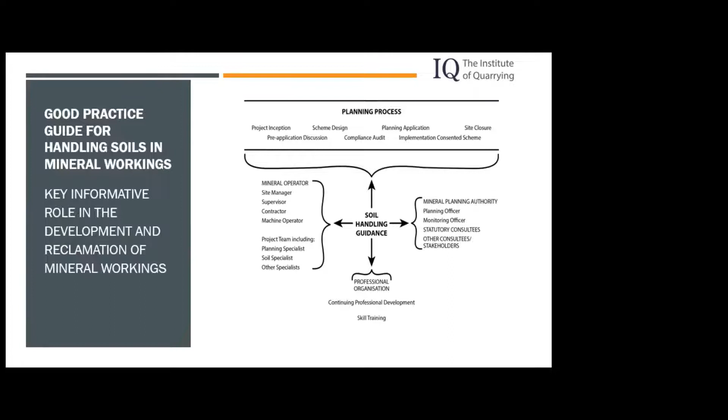It also has a training role by way of the Institute. And I think, just as a side comment, those in operations need to be involved and work as an integrated team from the planning to delivery of the soil works, and not as separate parties as often happens.

Yes. Sorry, we'll get the hang of it. We'll get the hang of it. It's a little monster, isn't it?

The need for the new guidance has come about because soils are now recognised in planning policy terms as natural capital, and as such are important for the well-being and sustainability of our way of life, just as mineral resources are. In this context, soils are to be viewed to be of equal importance to the minerals they cover. This is really a new way of looking at things and treating soils in mineral workings.

Success. The policy applies to all soils for their safeguarding and sustainable management. It applies to relatively young, shallow soils equally, as well as old, deeper soils associated with agricultural land uses, and to mineral soils as well as peat wherever they are deemed to occur, and to soil forming materials where they are to be relied upon.

All are to be restored to a high standard. No distinction is to be made between the high ALC grades 1 to 3A, i.e. the best and most versatile type, what we often refer to as BMV, and the non-BMV ALC grades 3B to 5 agricultural soils, or any other soils.

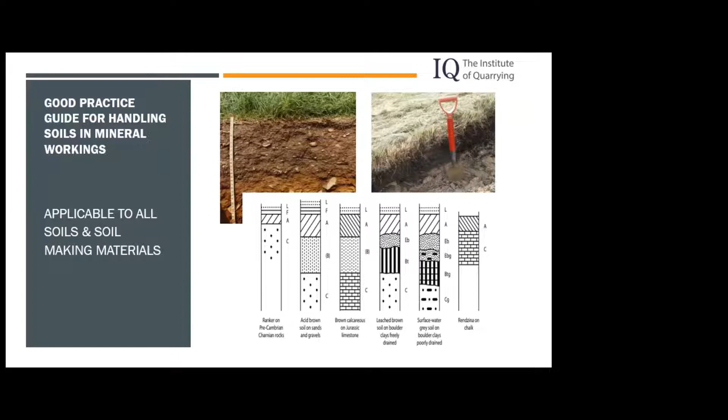I'm going to say a little bit now about choice of machinery and practice.

Safety is the overriding operational consideration in the adoption of the guidance and deployment of machinery and practice. It is for the competent operator to decide. It needs to be conveyed and integrated into the design and operations from the inception of schemes. The safety reasons for not recovering soil resources or adopting the guideline practices must be made clear in the Soil Resource and Management Plan, the SRMP, which I will say a lot more about later.

This is not new, by way of comment, and will already be the required practice. What we need to do is communicate the scope for the safe use of machinery and practices at the planning as well as the work stages. Safety will determine and justify what is proposed.

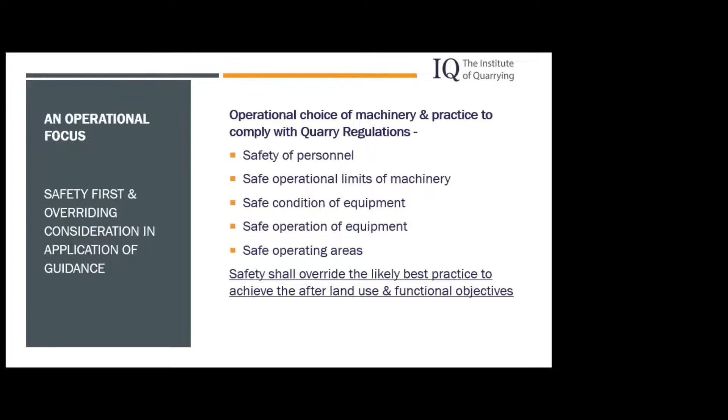Operational costs are not a reason to dismiss the guidance and should not override the choice of machinery and handling practice. If cost is the deciding factor, this should be declared in the SRMP.

Typically, cost factors include differential plant rates, amount of plant needed, combination of plant required, capability and work rates, availability. But they must also include the associated remedial work required.

Total costs are not simply the price of the number of machinery units or amount or speediness of work involved by the adoption of a practice, but they are also the experience of the machine operators, the mode of working, i.e. whether it's progressive to avoid double soil handling, the occurrence of delays, and the costs incurred by additional remedial works.

Operationally, this is by way of comment. For more realistic and competitive costings between machinery options and practice, we will need to factor into the cost analyses and budgets those remedial operations that are an integral part of the methodologies and practices that cause compaction. Whilst this is not new, the guidance makes it clearer by incorporating the actions required within the methodologies themselves.

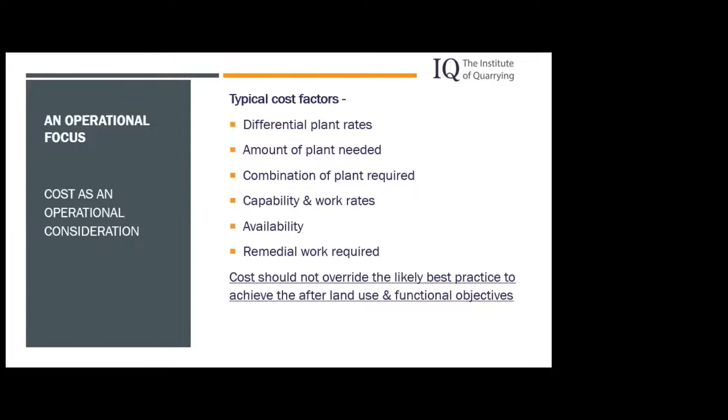Say a little bit more about methodologies, choice of machinery, just to put them into context. The guidance provides methodologies for two combinations of machinery and one hybrid practice. The four handling practices for the stripping and replacement of soils.

So the machinery operations to strip and replace soils are either an excavator and dump truck, or a bulldozer, dump truck with excavator to load. The handling practices to strip and replace soils comprise either the bed strip practice, the windrow peninsula practice, the modified layer by layer practice, or the hybrid practice.

All these are shown and described in the guidance, so I shall not go into detail at this particular point. In the guidance, there are the excavator and bulldozer-based methodologies for soil storage, removal of non-soil artifacts, large stones, and for decompaction. Obviously, other machinery not directly handling the soils may also be needed to maintain access routes, so on and so forth. You may have seen that motorized earth scrapers have reappeared.

These are not included in the guidance, but methodologies for their operation can be found in the MAFF 2000 guidance, which is still available on the DEFRA archive website. The choice and rationale for the machinery and handling practices should be given in the SRMP, which again I will say more about later.

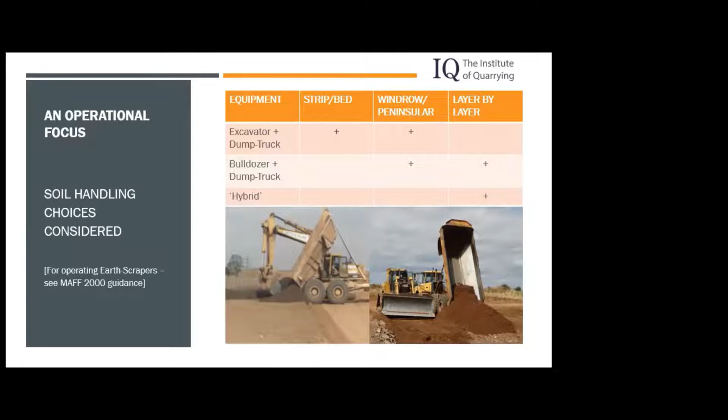Sorry, I should have been showing you these slides. Those are the basic choices of machinery, and this one is where the guidance provides detailed operational methodologies for each machinery and handling practice, and remediation measures to be deployed. These are provided as individual standalone sheets, A to O, which can be distributed to guide contractors and machine operatives.

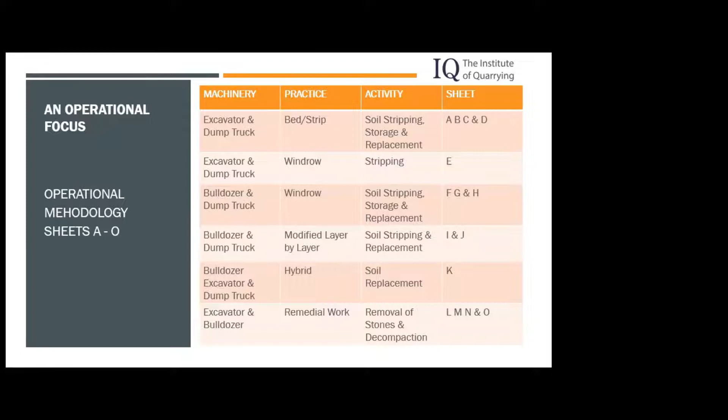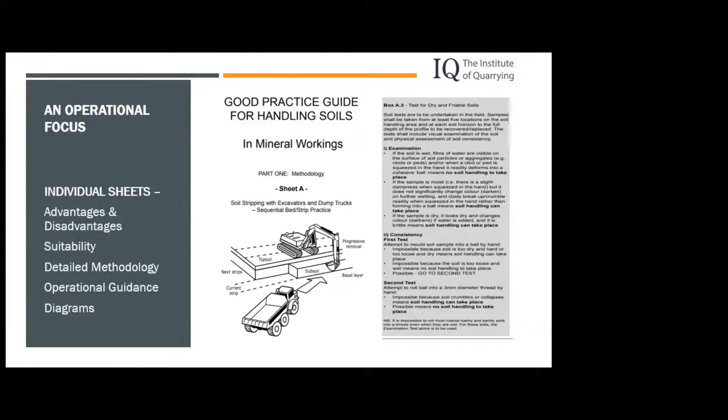Each methodology gives advice on the advantages and disadvantages and their suitability. There are procedures for determination of soil wetness and protocol for wet weather included. Importantly, to avoid them being overlooked in the soil replacement operations, remedial measures are now integrated into each methodology for soil replacement.

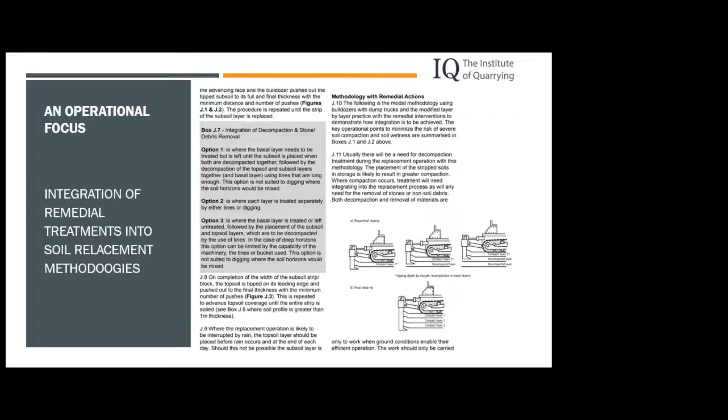I'm going to say choice of machinery and practices and soil compaction. The new guidance is based on a risk-based approach where judgments by informed soil professionals determine the significance of choices adopted and consequential actions required. I will come back time and time again to this particular approach and the integral role that the professional soil scientist has to help you see your way through the guidance and its implementation.

Operationally, soil compaction arising out of soil handling is the most commonly occurring condition limiting the achievement of intended land uses and services on restoration. After safety, compaction is the main consideration in determining the methodology to use. Compaction is the compression of the soil structure form which determines its functional characteristics. This is primarily caused by trafficking by machines over the soil material and when in bulk transit and storage.

The degree and significance depends on the machinery used and handling practice adopted, but also the soil textural class and its wetness. Remedial treatment during and after soil replacement is possible, but the effectiveness is dependent on the capability and condition of the equipment being used and the soil being in a dry condition.

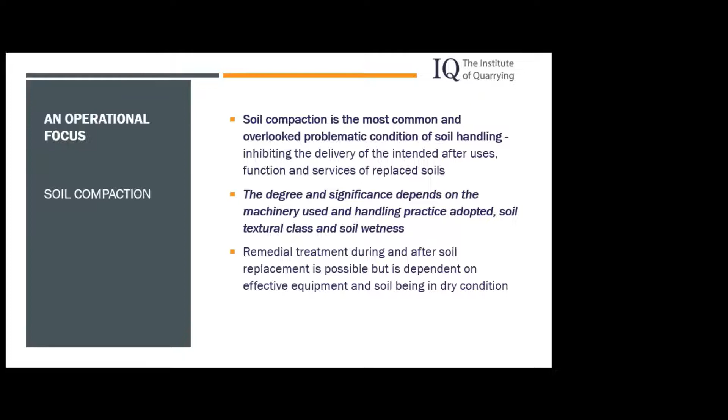Operational effectiveness is less certain than the avoidance and minimization of compaction. There may be restrictions on implementation of effective remediation by ripping or digging, where the replacement soils are over inert backfill and situations like silt lagoons. By way of comment, the main operational consideration in most cases needs to be the avoidance and minimization of compaction for the certainty and cost-effective delivery of the intended land uses and services and their outcomes.

All these slides that you'll now see, which may not be particularly clear, are taken from the actual guidance itself. So I'll make some general comments over them.

Operational guidance is given as to the inherent risk of causing compaction through the choice of machinery and handling practice. The relative risk of compaction by the machinery and handling practices are shown in this particular slide, where the least risk, when soils are dry, is with the excavator, dump truck, and the bed strip practices combined. Hence its often favoured status.

The highest risk is with bulldozer dump trucks using the windrow, peninsula, or layer-by-layer practices, even when low ground pressure dozers are used. That might surprise some people, but it's actually a fact.

Comment: operationally, the need for remedial work can be managed by selecting an inherently lower risk option. Here, the soil professional will be able to advise as to the risks and the consequences of particular choices and the restoration outcomes. So there's not a prescription that you must use one particular method over the other. It's a matter of what the circumstances are and what the risks involved are, and whether there is a consequence for the particular type of land use that is being aimed at. That's why you need professional advice.

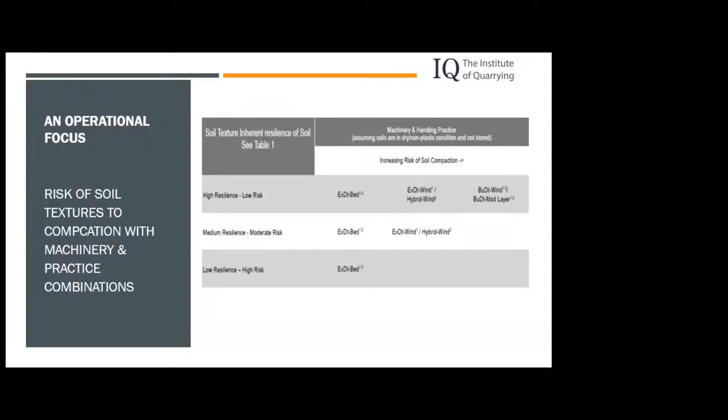There may be circumstances when the guidance for soil stripping cannot be followed, such as the occurrence of archaeological artifacts. In this slide, only certain practices may be acceptable for watching briefs, investigations, and recordings. In some cases, trafficking of the topsoil may even be necessary to protect the particular archaeological interest. Again, the justification for the choice should be given in the SRMP, which I'm going to come to shortly.

The expectation is that soil compaction will result from soil handling using bulldozer-mediated practices, and all options where the soils are in a wet condition. Decompaction treatment, as advised by the soil professional, should be deployed during the operations and/or subsequently in the aftercare period. Again, these are to be dealt with in the SRMP.

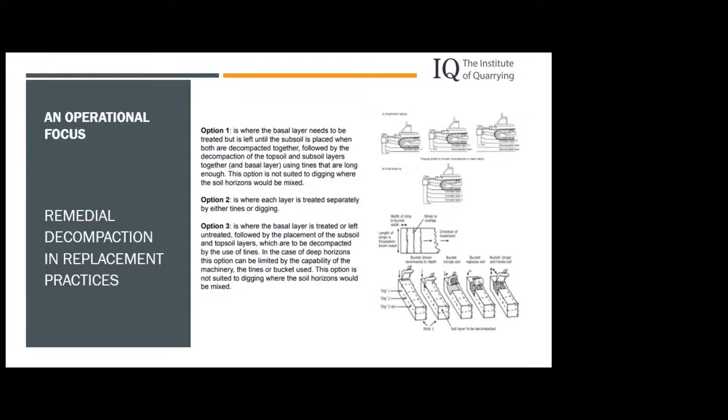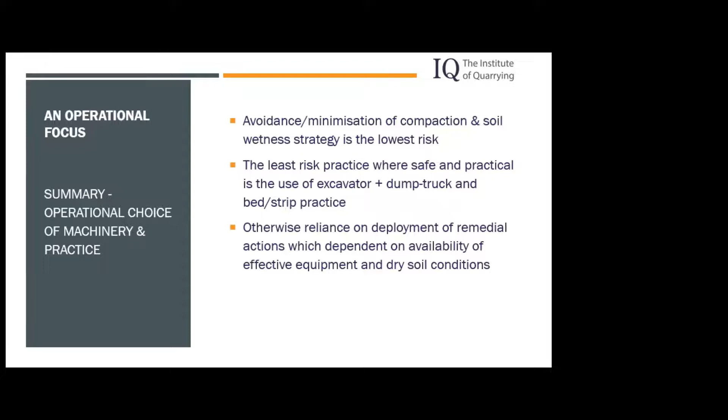So to drive the point home, in summary: operational choice of machinery in practice, avoidance, and minimization of compaction and soil wetness is the lowest risk strategy. The least risk practice, where safe and practical, is the use of the excavator and dump truck and the bed strip practice. Otherwise, there is reliance on the deployment of remedial actions, which depend on the availability of effective equipment and dry soil conditions.

I've mentioned soil wetness quite a few times in the past few comments, so I'm going to talk a little bit more about that. Soil wetness in the guidance comes down to a managed approach.

Soil wetness commonly exacerbates soil compaction during handling with earth-moving machines and the practices used. It's an important and significant operational matter, not only because of the consequences of compaction, but also the costs due to delays. Operationally, the management of soil wetness requires careful planning and flexibility.

In the UK, soil wetness is largely seasonal, with the soil profile becoming dry in the summer and where there is vegetation. It varies geographically and altitudinally, and with soil textural structure, porosity, depth to the water table, topography, and flood risks. Locally, it can be exacerbated by watercourses, ditches, and field drains.

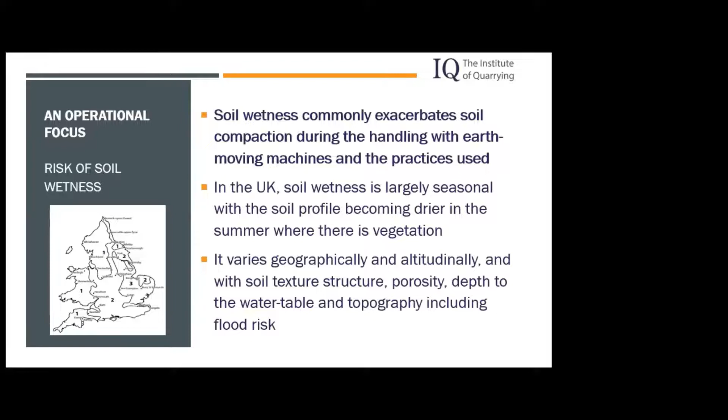Historical regional soil moisture deficits and field capacity days provide indicative regional summaries and can be used to broadly plan soil stripping and replacement operations.

For example, most of Devon is in climate area 1. Here, for topsoil with a low clay content, the potential for stripping is between mid-April and early October, whereas in Suffolk, in the drier area 3, with a similar soil, it would be late March to early December.

Should a profile in Devon with a high clay content need to be stripped deeper than, say, 60 centimetres, the potential is between mid-July to mid-September, whereas in Suffolk, for such a deep soil, it would be between late June to mid-October.

Although in both cases, operations should be curtailed earlier in September to enable an adequate vegetation cover to be established before winter. While such data serves for general planning, for field operations they should not be relied upon, as we've experienced over the past 3 years, where we've had drier springs and wetter summers.

By way of comment, this is also not new and should already be normal practice. However, it's probably the most difficult operational constraint to be confronted. It belies the need for foresight and flexibility in planning of resource extraction and soil handling operations.

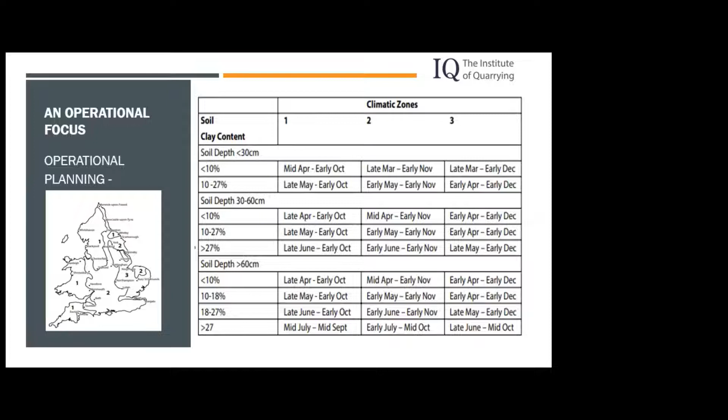The soil professional can advise as to the risks due to soil wetness and the consequences for restoration outcomes.

A long-established field-based soil method, well familiar to the quarrying industry, is to be deployed for determining actual soil wetness and to manage the start and suspension of operations, in concert with an established rainfall protocol to suspend and restart soil handling. These are to be applied to all operations of soil stripping, storage and replacement, and are incorporated into the methodological sheets in the guidance.

Measures can be exercised to minimize delays due to rainfall events, such as the pre-installation of drains, maintaining transpiration of cover vegetation, and their sequential removal. However, in some circumstances, soils can be permanently saturated, and an alternative practice will have been agreed with the local planning authority during the planning process. Again, by way of comment, this is not new and should already be normal practice.

The guidance integrates the protocols for and determination of wetness condition into the operational methodologies. It reinforces the need to determine soil wetness condition on an ongoing basis and being prepared to suspend operations when soils are in a wet condition. While soil professionals can train site operatives in field testing, achieving the desired outcome depends on the willingness to decree and maintain stoppages according to the guidance.

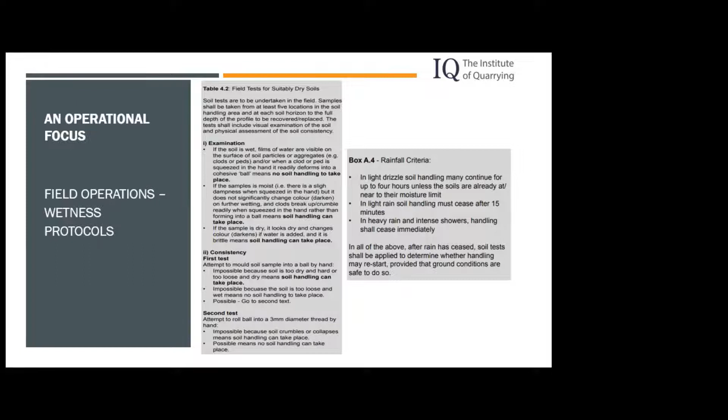I've mentioned the soil resource management plan now several times, and this is a key element of the guidance. It's a key document from an operational point of view. So I've referred several times to the soil resource and management plan. The SRMP is not new. It was devised by British coal operations as routine practice in the 1980s and was part of the 2009 DEFRA construction code, which is currently being revised. It has been adopted and incorporated into the new Institute of Quarrying guidance.

It is to be the operational guidance for consented schemes, and it is to be reviewed and updated as a live document at least annually. Any necessary changes due to operational circumstances can be agreed with the planning authorities through the Town and Country Planning Act Section 73 process. Broadly, the function of the SRMP is to conserve soil resources and their functions and ecosystem and environmental services, to enable the delivery of the intended land use consistently and efficiently, and to ensure compliance with planning policy and consents.

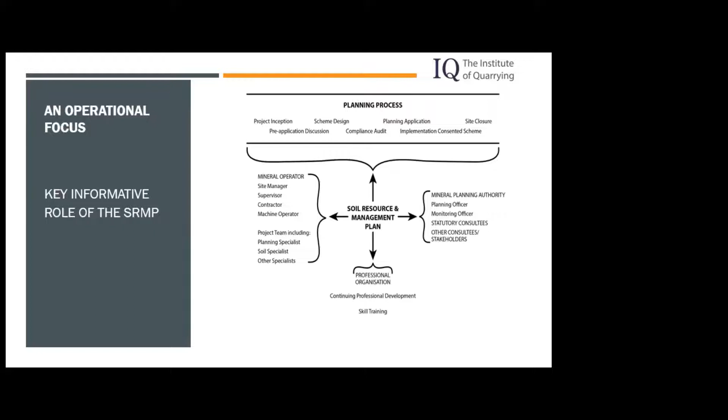So in brief, the SRMP is to include the soil resource inventory, the soil handling and management plan covering restoration and aftercare, the scheme design including all the access routes, soil storage and other infrastructure, but importantly type of machinery and handling practice, giving the rationale for selection and deviation from the guidance, for example safety or archaeological or site circumstances, including the proposed operational rainfall and soil moisture limits, identification of the roles and responsibilities and lines of communication of all those involved, and proposed monitoring and reporting.

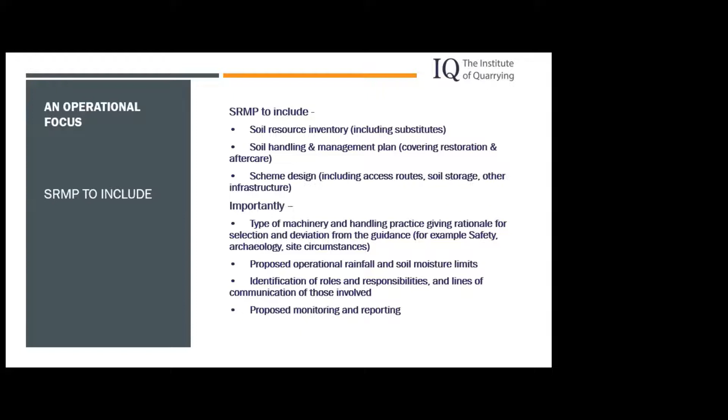Monitoring and reporting, the Cinderella practice. I was quite proud of that because it's actually quite true. Monitoring by a soil professional is an undervalued activity, but a crucial one and an integral part of the guidance in the SRMP. It provides the basis for any remedial actions needed and their efficacy in the subsequent aftercare period. In other words, sometimes remedial works may not actually be necessary, but you need someone who's competent to tell you that, so you don't have to expend your money and time doing it.

It provides a factual basis for compliance and completion audits by the planning authority and oversight and regulation. It provides evidence base for the SRMP justifying the deployment of alternative practices and operational decision making, and provides the basis for improvement in efficiencies.

Monitoring is often the weakest link in the whole process, and I often hear, why should money be spent on this? The omission is operationally short-sighted. It should be a component of the SRMP and mandated at the granting of planning consent. If you wish to use alternative practices, monitoring will provide you the evidence that your alternative way of doing things produces the end results. So don't discount it, it can pay great dividends in your operation.

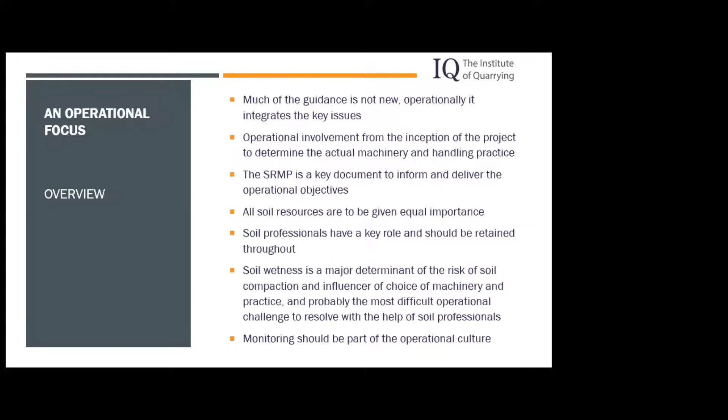Soil wetness is a major determinant of the risk of soil compaction and influences the choice of machinery and practice. This is probably the most difficult operational challenge to resolve. And again, monitoring should be part of the culture. So what I've done then is just try to summarize the key operational elements.

Competent soil resource and management plan, key. Identification of soil resources, adherence to soil wetness protocols, lowest risk machinery combination practice, effective and timely remedial treatments, trained and experienced machine operatives, and retained professional advice and monitoring.

So finally, thank you for listening. Apologies for my poor use of this device, and hopefully it didn't distract too much.